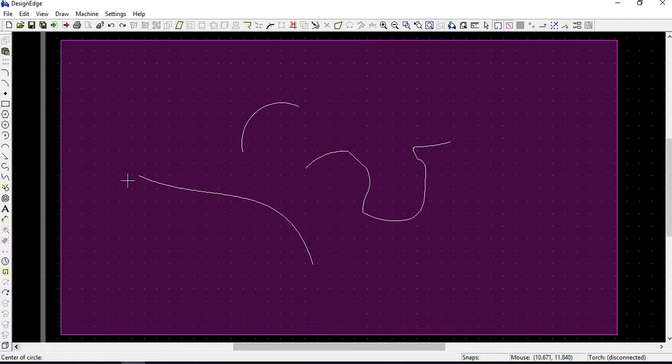So I'm going to draw circles at the ends of this spline and turn it into a slot that's centered, not offset from its original location, but centered exactly where it needs to be. So I'm going to push Q for circle. I'm going to make a full-size circle of our slot, which is 0.25, and I'm going to end snap it right there. And then I'm going to draw another one, 0.25 inner, and I'm going to end point snap it right there. Now let me zoom in to that so that you can see it nice and up close, and I'm going to show you the offset method.

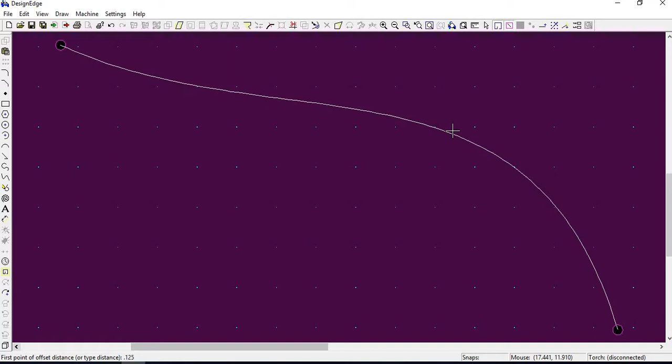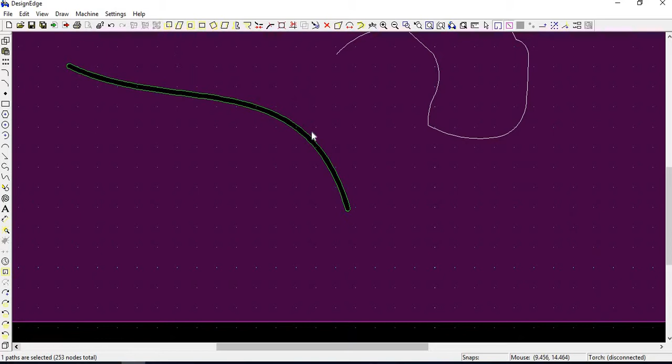It's very simple. You push offset O, half the distance or width of your slot, so 0.125 or an eighth of an inch for a 1/4 inch slot, and hit enter. The first side that you click on, you hold control. The second side, you do not hold control. Click, click, there it is. I'm going to X for trim out. I'm going to click right there and trim out those pieces. I'm going to hit escape and J, and there I have a perfectly centered 1/4 inch wide slot with rounded ends.

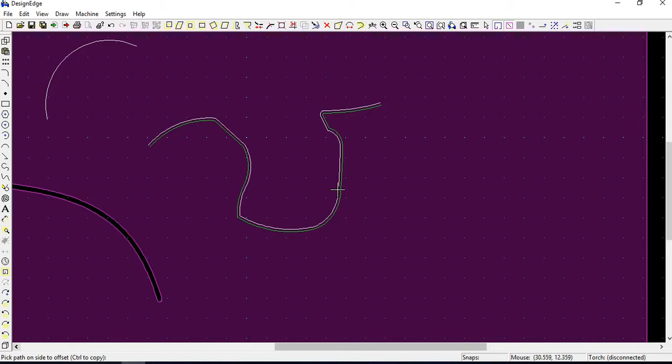Let's say you have a piece over here that's a crazy shape. This is one I just hand drew. I'm going to offset 0.125, enter, and I'm going to hit control, and I'm going to let off control. Or if I don't let off control and I hold it again, now I have this beautiful center. So there's the center of my slot, and there is the outsides of the slot.

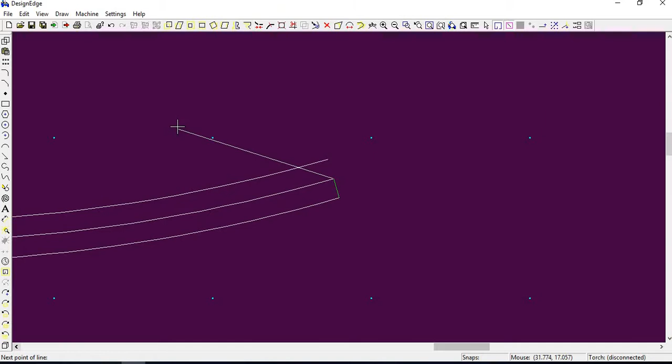So if I want to make an end of this that is tapered or angled on one side and not the other, then I can hit line, end point, near point, get off over here like I want it, and I can X trim, X trim. Now I got a cute little end that goes right to the center. I can do the same thing over here. Line, end point, angle, whatever you want. You can orthogonal if you want to square all this up.

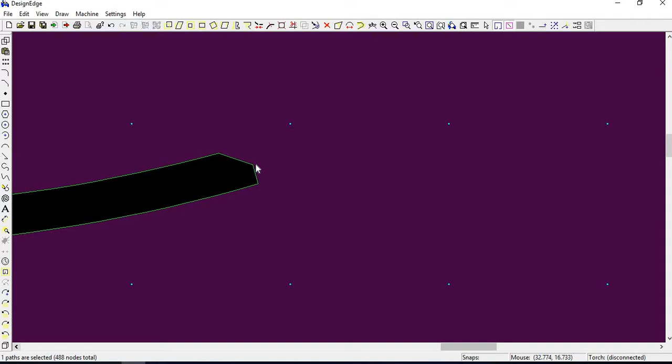X, X. I'm now done with my original line, so I'm going to delete it out. And I'm going to click on J for join. So now you make a piece where the center is, and if I wanted to point that, I could have done that too. Now, endpoint to endpoint snap to make it perpendicular. Let's say I want this one, I don't know, we'll make this one a 1/2 inch.

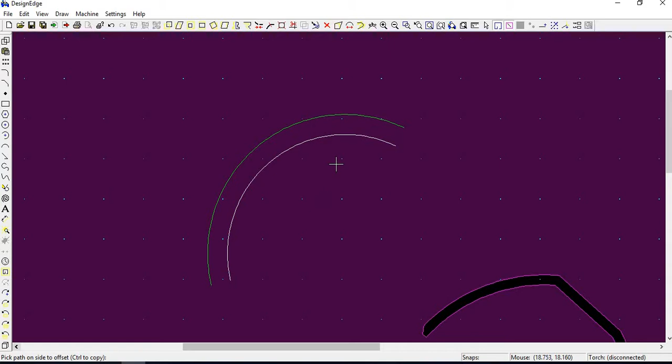So I will offset 0.25, and I will hit enter, and I will control. There's the one side, there's the other side with no control, moves it right over. Not a difficult process to hit line, endpoint, escape. We'll go here, line, endpoint, E for endpoint, click, escape, join. There's your 1/2 inch slot, arc, square ends.

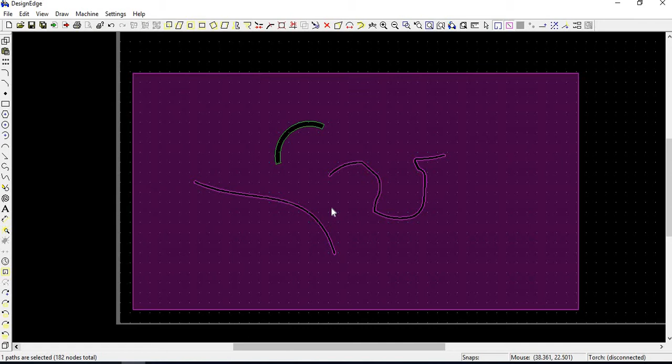Hope that makes more sense. You can see that you can make slots in any shape you want, and if you needed to array or otherwise arrange them, that'd certainly be optional for you to do. But hope that helps clarify kind of what we were looking for in making slots that aren't a rectangle.